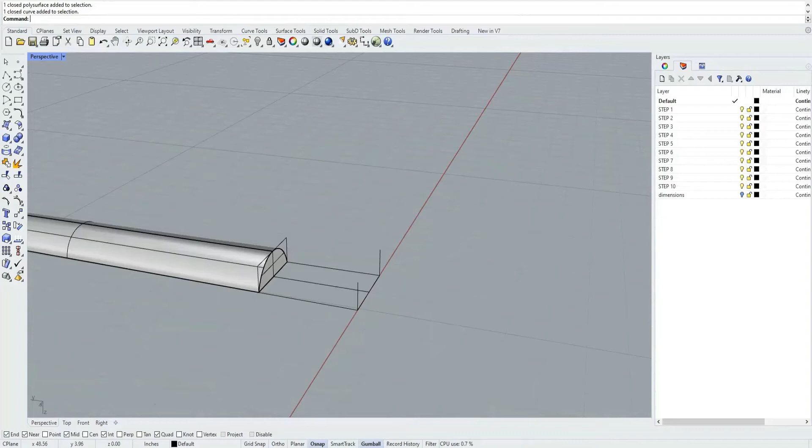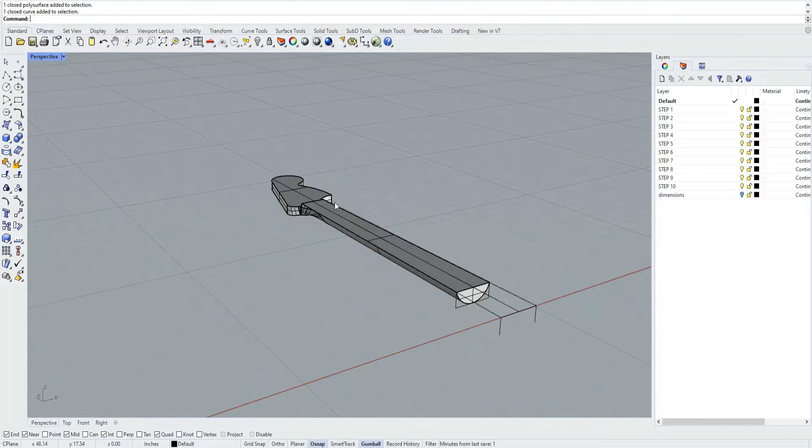Today we're going to be looking at how to model the neck of a guitar. If you're wondering how we got to where we are right now, I encourage you to go watch the previous video in this series. I'll try to remember to link that up in the corner for you guys to go watch. That explains how we got everything from the shaft to the head to the transition between the two. Today we're going to be looking at this part right here, how to model the heel of your guitar.

I want to mention right before we get into this, the dimensions don't really matter so much. We're mainly looking at how to learn the surfacing techniques of how to do this rather than really focusing on the dimensions. I encourage you to go dimension the neck yourself depending on what kind of guitar you want to build. Anyways, so I have this 3-inch long heel here.

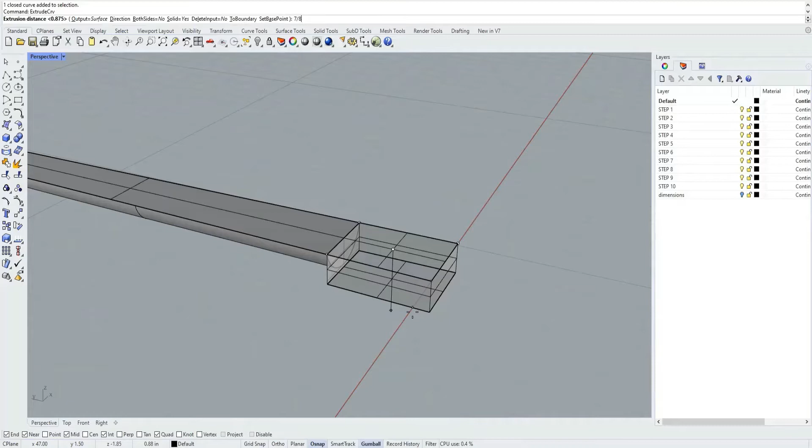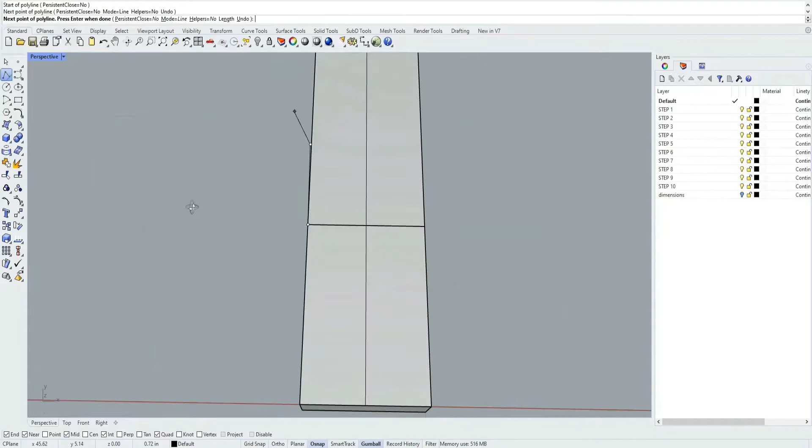I'm going to extrude that out to a depth of 7/8 of an inch. So this will be where our heel is, and then where we're going to be transitioning to that will be a 1.5 inch area in between the two here. So I'll draw a line out vertically and across, and then if we hop into our 4 view here, we can just get our trim command, select that as our cutting object, and trim that part of our neck away, and we can delete the lines we don't need. So this is where our transition is going to take place here.

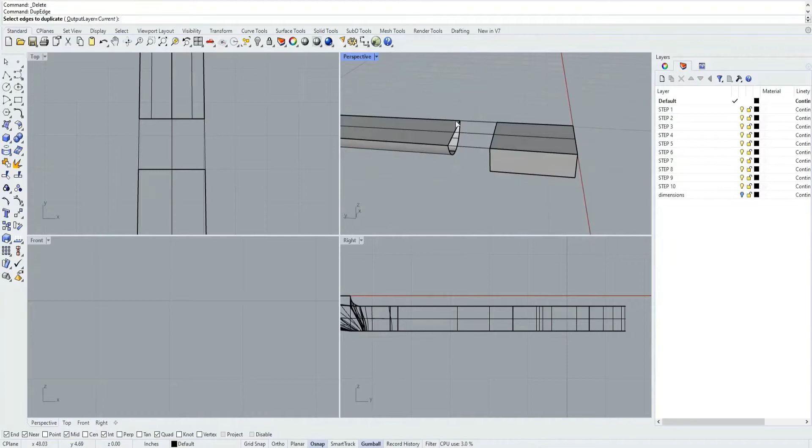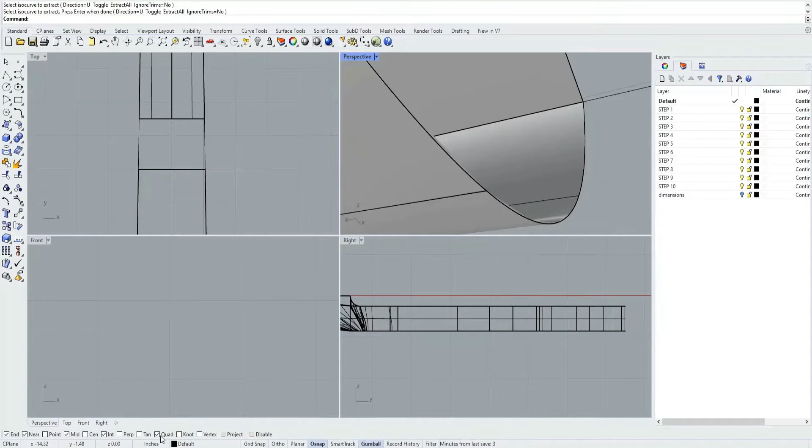We're going to go ahead and duplicate some edges, which will be along the shaft of the neck, and we're going to run extract ISO curve, and we want the middle of the neck. So for me that is I think a quad here. I'm going to go for the end intersection. If you're not getting those prompts there, turn on your O-snap and make sure the needed boxes are checked here in the bottom left.

So now that we have that done, what we're going to need to do is grab a polyline, connect to the corner of your box there, do a 0.5 line directly towards the back corner there, and do the same on the other side. So now that we have that, we can right click on the ellipse from center. We'll get a drop down menu and we'll select the ellipse diameter.

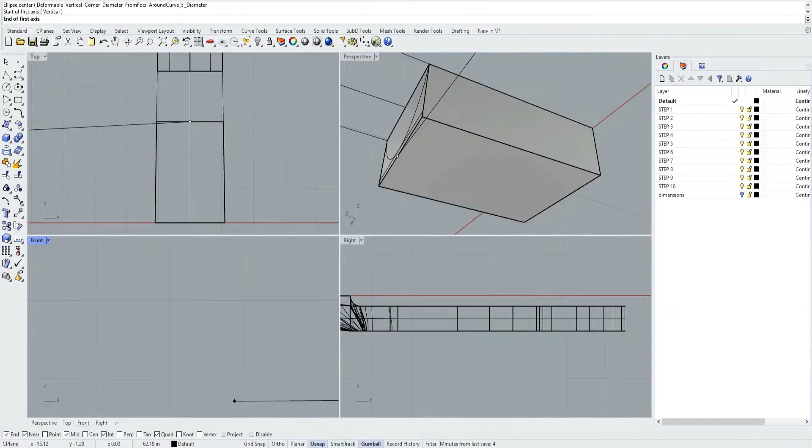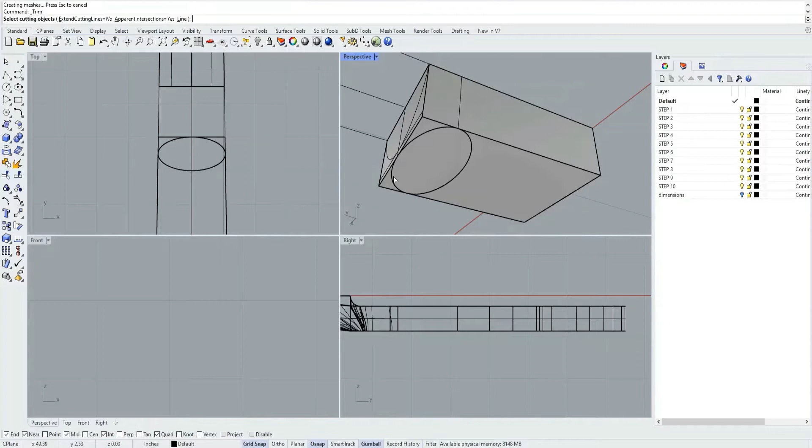So our first axis is going to start in the middle of our box there. If we go over to our top view and hold shift down and turn your grid snap on, you will get a 1-inch line. From that, we want to select our second axis as the end of that 1/2 inch line we drew earlier. So now we're going to grab that ellipse, extrude the curve, and go up to the top of our box. Then grab your trim command, select the extruded oval we made, and we can start to trim away parts of the box there.

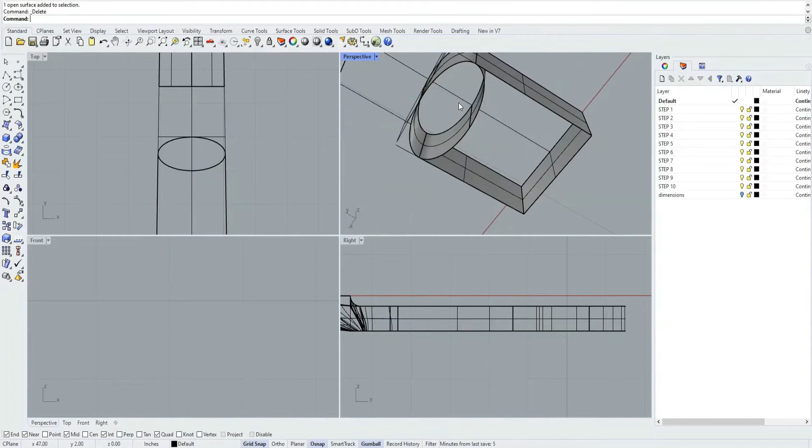So now select the box and the oval, press explode, and we get all of our surfaces that we're going to need. We can go ahead and delete everything off of the top and the bottom. Once you do that, press trim, select your side panels, and trim away the back portion of that oval. We can also delete some of these lines that we won't be needing, just so we don't get confused when we go to do the rest of it.

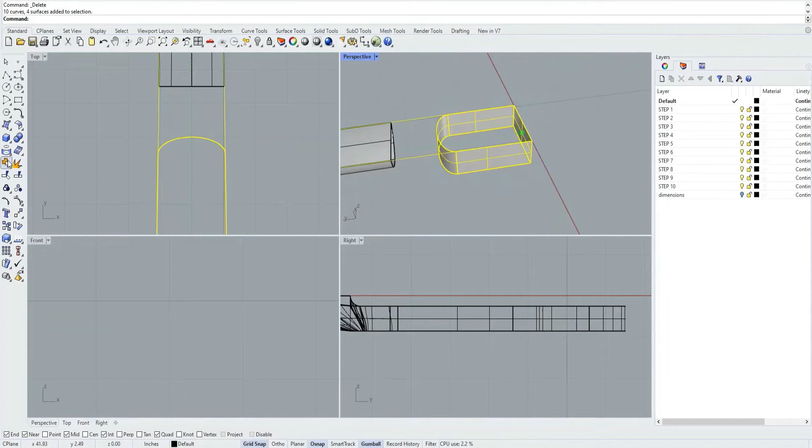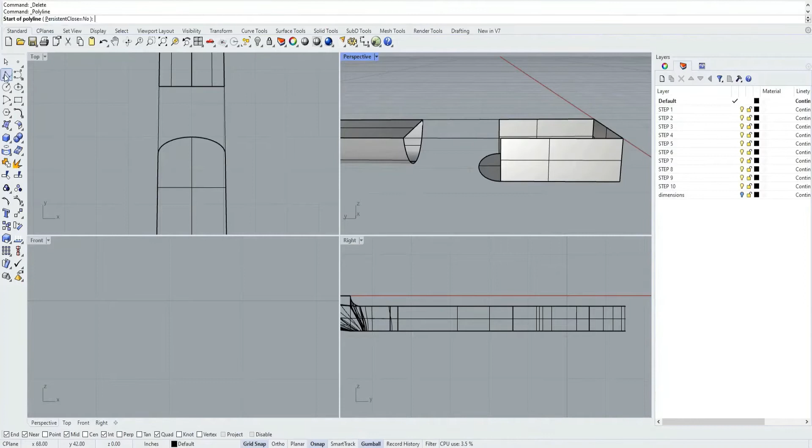Okay, so now that we have this bit here, we're going to select everything, join it up, do the cap command, so we get an enclosed box here, explode it one more time, and we can delete this face of the oval and the top portion. So this is what we're left with, kind of an empty box of where our heel will eventually end up. In order to start the transition here, we need to add in some guiding lines. So get that corner of where our ellipse meets the box, over here to the right view.

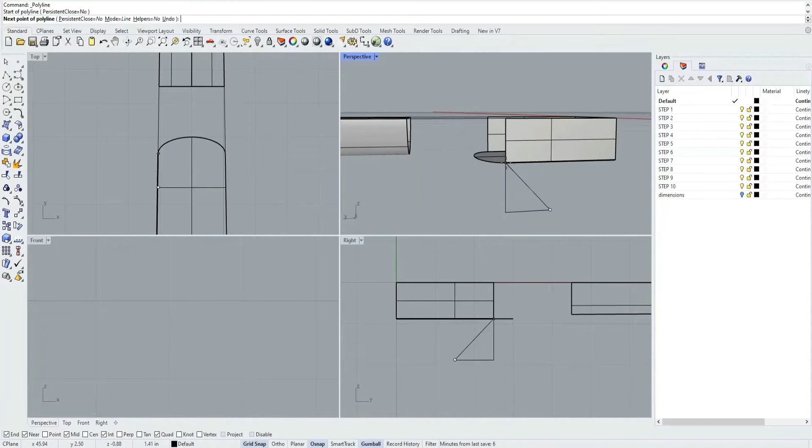Enter 1, go down that amount, and then 1 again, and go back towards the end of your heel, then make a connecting line between the two. This gives us a 45-degree angle.

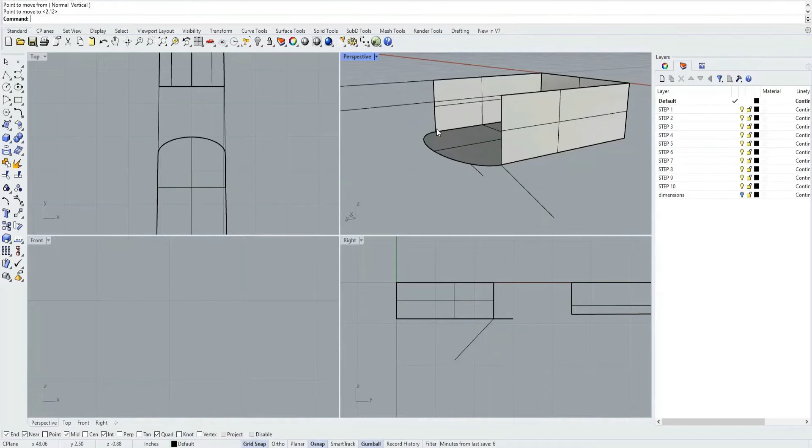Now that we have this line, we're going to copy, paste that, and run the move command. We will move that curve from the endpoint right where it is to the other side. You could also mirror that, but I find this to be a more consistent way of doing things. Rhino isn't always the best at getting things accurate when you're snapping, so I just like to move it to the correct point.

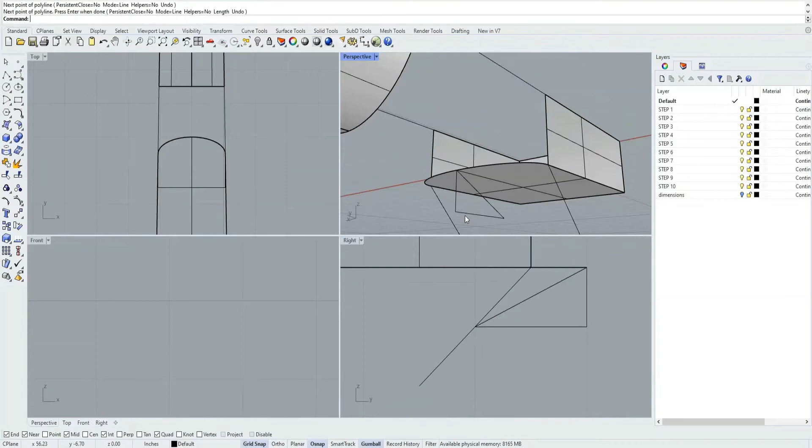For the middle, we're going to connect to the quad there, go down a half inch, and then over an inch. You can see that's kind of in the middle of where that is, but we can select from that point and connect the two ends. We'll end up with something that looks like that.

From here, we're going to run an arc blend command. Select the ends of the lines we duplicated earlier, and you should start to end up with these types of curves.

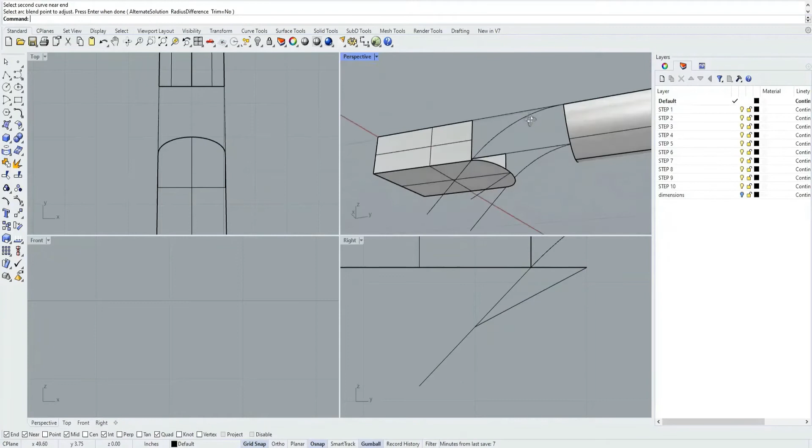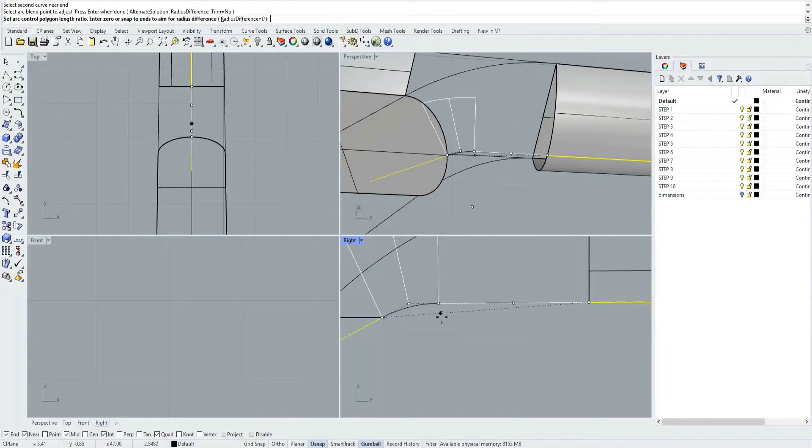When you do the middle curve, you'll end up with something that looks somewhat like this. So turn off your grid snap, grab this middle control point, and where you can see my cursor right now, this white line, you want that to be slightly above the black line. Otherwise it's going to look a little bit weird. So we can enter that.

We're all done there. We're going to duplicate some edges. We're going to want to duplicate the ovals here, and press enter and join those.

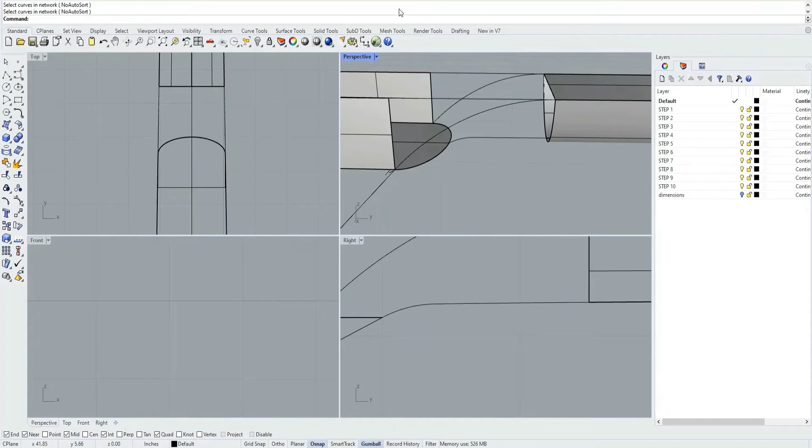Next we're going to be running a kind of finicky command. In your perspective view, make sure that it looks just like mine. We're going to run a command called NetworkSrf. Again, turn on no auto sort. Then I need you to run these commands in the exact same order that I do them, or else it probably won't work. First, select the arc that is closest to you, then the one in the middle, then the one in the back.

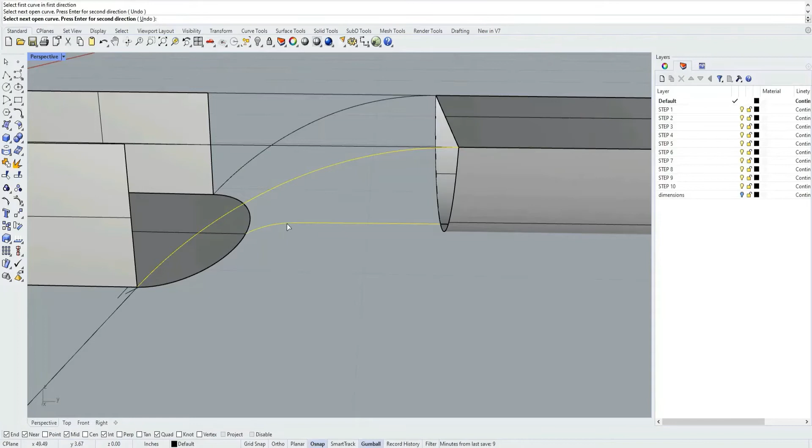Select enter. Then on the shaft side, we can select that one, and then we can select our heel oval there. When we press enter, we end up with this nice surface. As far as I know, there's no other way to get this surface, so I prefer this method.

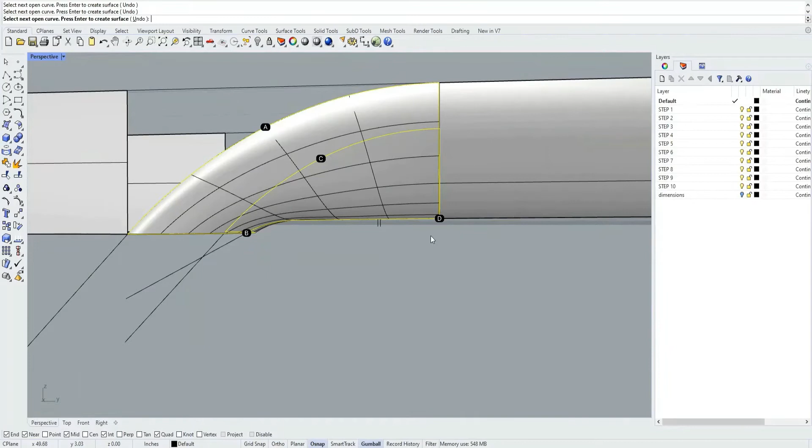Make sure they're all in the position order. You don't want it in any other one, so all position. We'll click OK. Next, we're going to want to delete these side panels. Go to Polyline, select the outline of where that side panel is going to be on both sides.

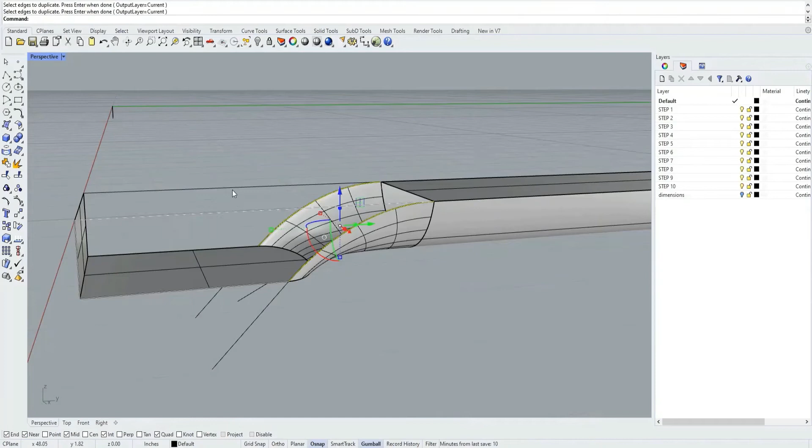We're going to run a duplicate edge command on both sides. Grab those two polylines that you just made, and we'll join everything and then run a planar srf. Now we have two side panels that are going to match up to our model here.

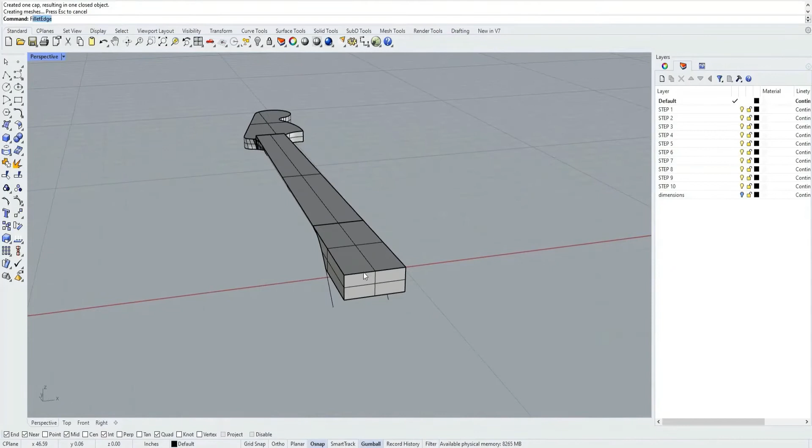At this point, we can just select everything, press join and cap. At this point, we're going to start getting into our fillet edges. I'm going to go for a 0.25 to round off the bottom here.

At this point, if you are planning to use this on a CNC machine, you are done. You can click off the video, it should work great for you. If you are planning on modeling an appearance model and you want it to look really good, we're going to get into filleting the bottom of this surface.

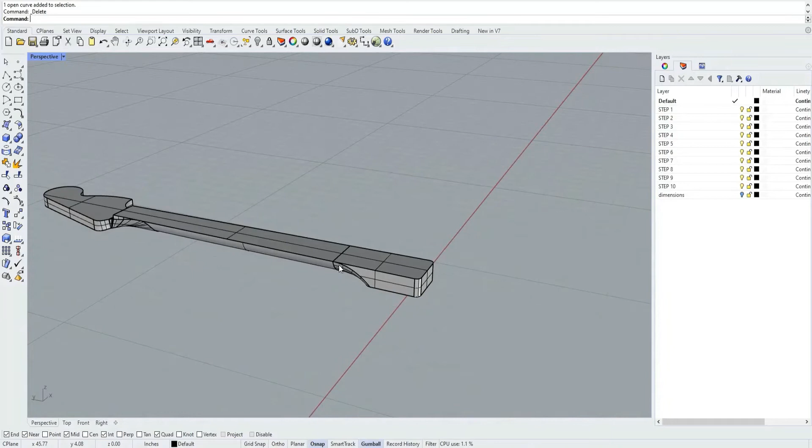I'm going to show you how to do a custom fillet that's going to look a lot better than the auto-generated one that Rhino will give you. But if you're not interested in that, this is all you need to do.

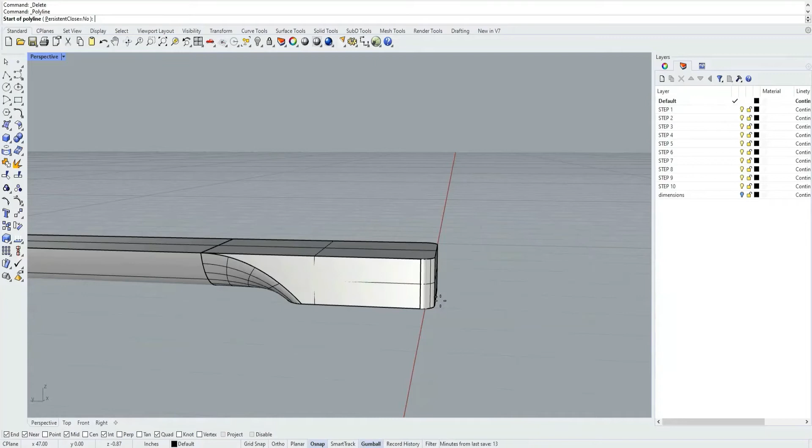Now that the only people left are the ones who want to go through the painful process of filleting in Rhino, we're going to want to select anywhere on the bottom of our surface. We're going to go back into our 4 view here. I want to end up with a 1/16 fillet around the entire bottom of my neck.

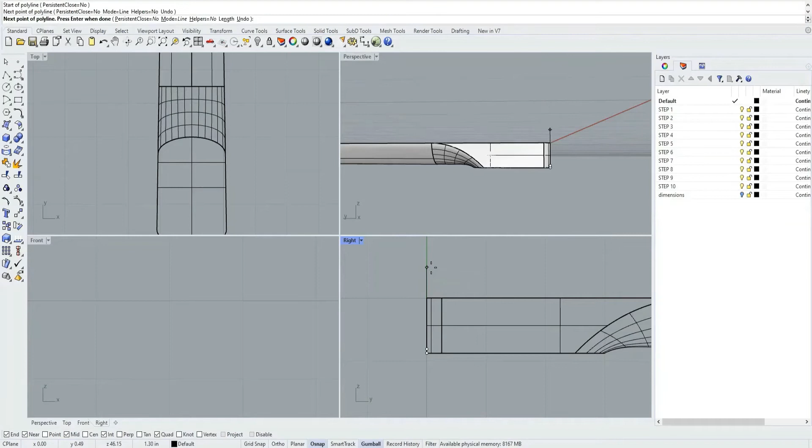So I'll select that there. From that point, I will select the end point. I will drag it across so it crosses the entire model. You can use your scale to make sure it goes all the way across the model. If you don't have that on, it's the gumball setting right there.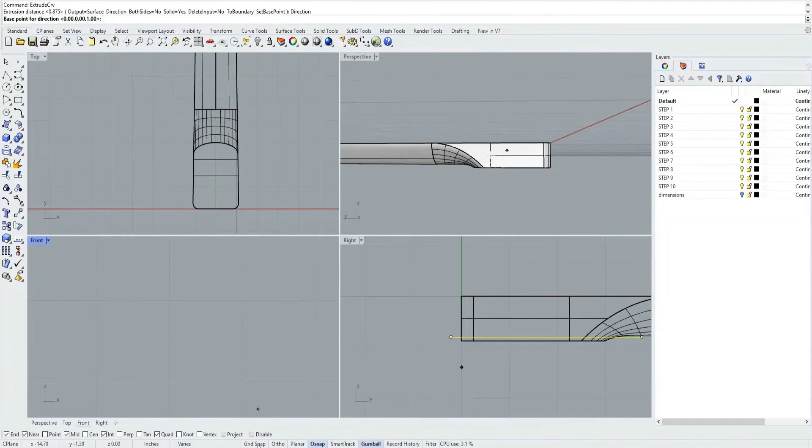From that point, we're going to do an extrude curve, and we're going to want to select the direction. Turn on our grid snap and make sure that is going sideways.

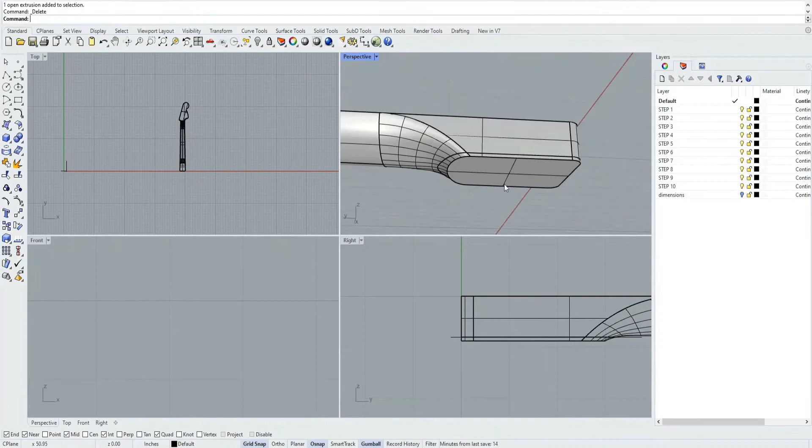Okay, so now we have a surface that we can split the bottom portion off here. So I'm going to go to split. Objects to split will be the guitar neck, and our cutting objects will be that planar area that we made there. So we have this now.

We're going to want to duplicate the edges on the bottom, join those up, and then we are going to offset that again, 1/16 inwards. Make sure that goes inside.

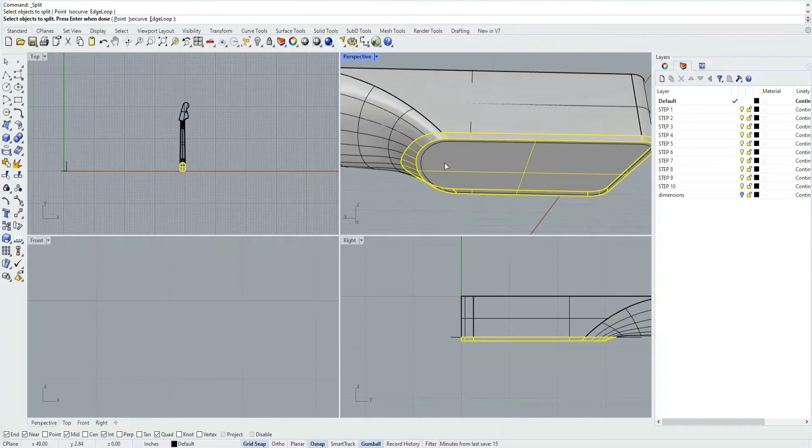Okay, great. Now we can do a split command again. We'll split this bottom section by the offset we just made, and we can delete the other portion that's left. So now what you have here is kind of a gap where you would expect a fillet to be.

We just have to make sure the computer knows where we want those fillets. So first off, we have to do a couple things. We have to extract ISO curves. So we'll select this one here in this direction right here that you see now.

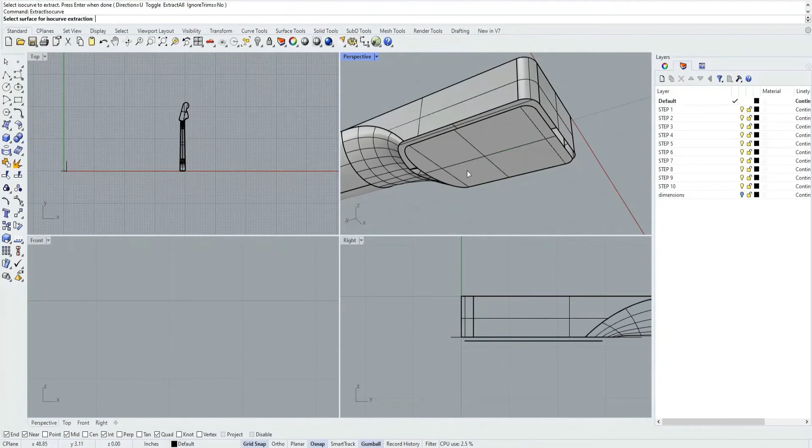We'll go to the end on both corners of the fillet there, and then we'll do that again, toggling the direction, and we'll have one going straight up the middle. So that will be our V direction right there in the middle, midpoint.

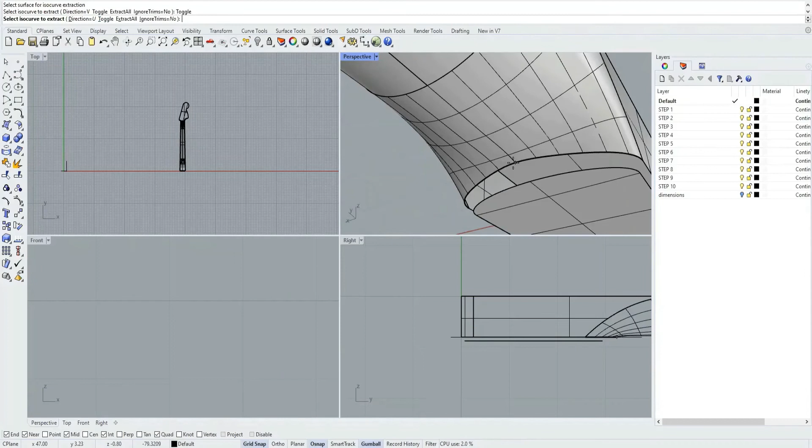Awesome. So from there we can run arc blends. So we'll select the middle of this, and we should still have - okay, so we have to do one more extract ISO curve on this one. Toggle the direction and get the midpoint. Okay, great. Now we can do our arc blends.

So we'll go to arc blend, select those midpoints there. We get a nice transition. We'll do the same on the other corners at the front.

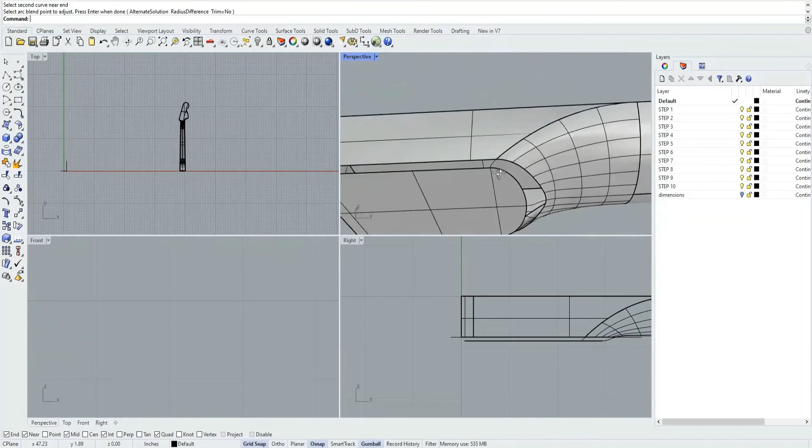Now for the back here, we're going to do something a little bit different because we want a perfect circular area here. So for our polylines here, I'll select the end. I'll go 1/16 up and 1/16 over. However, I could just select the end of my fillet there.

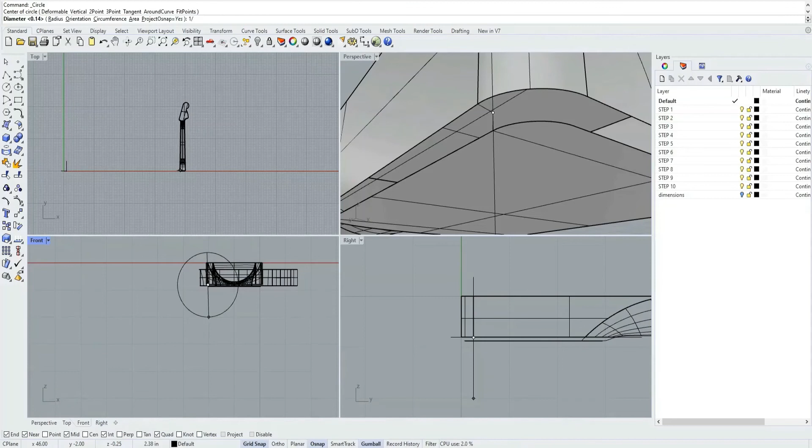After I do that, we'll take the center circle and draw it in the correct view. The diameter on that is going to be 1/8, so we can enter that in. Put in 1/8. There we go. I can hold shift, drag that straight down, and it'll give me a nice circle there.

We'll select our trim command, that's our cutting object, and we can just get rid of that.

Alright, so next we're going to want to mirror this to the other side, so just select it, press mirror, start of mirror plane, press copy yes, if that's not already auto checked for you. Select the midpoint of your model, hold shift, drag up, and click.

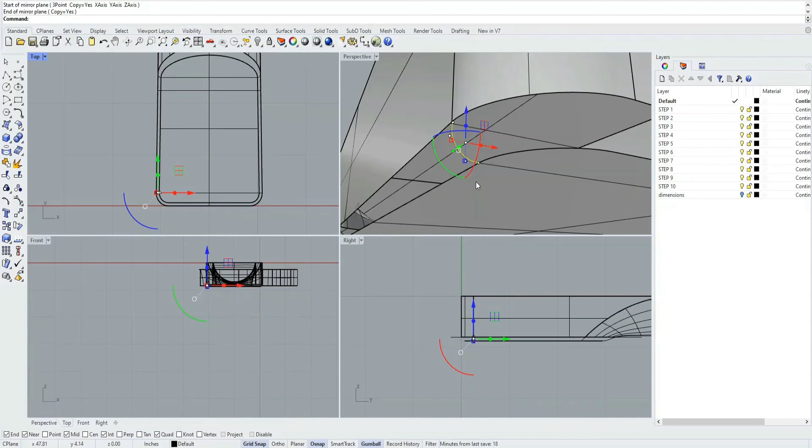Now as you can see, we will have the same fillet there. Alright, so after you have all those guiding lines, run a duplicate edge command. Select all of the lines on the top, and then join those up.

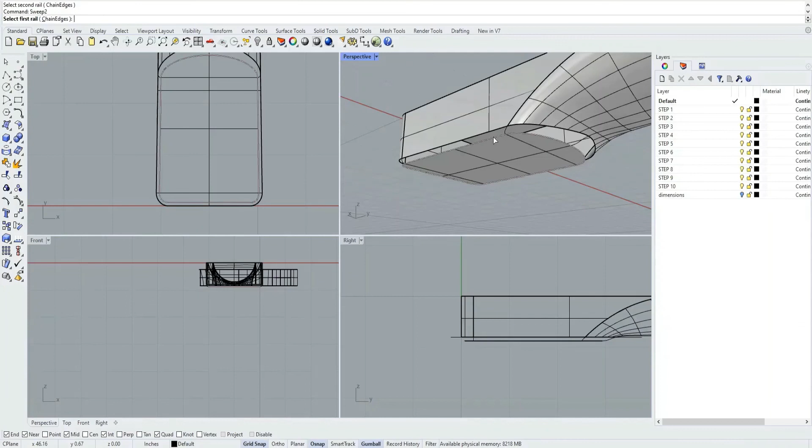Okay, so the last step here is just to run a Sweep2 command. So we'll select our first rail here and our second rail here, and then we'll just go through and select all of our sweep shapes, which tells the computer exactly how we want this fillet to look. And then once we've selected all those, we can just press enter.

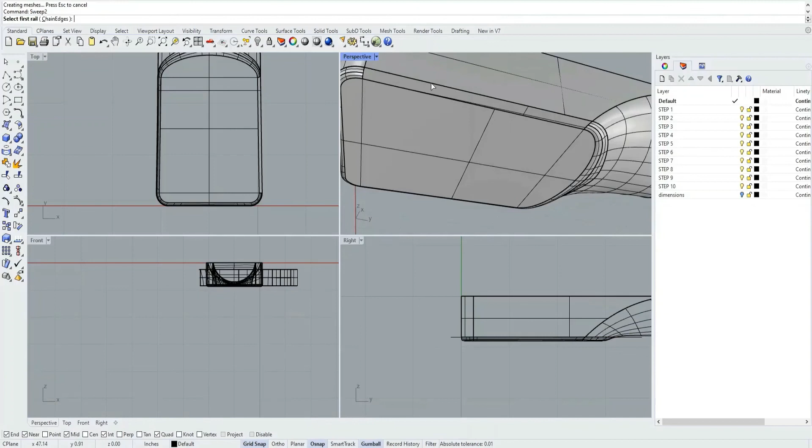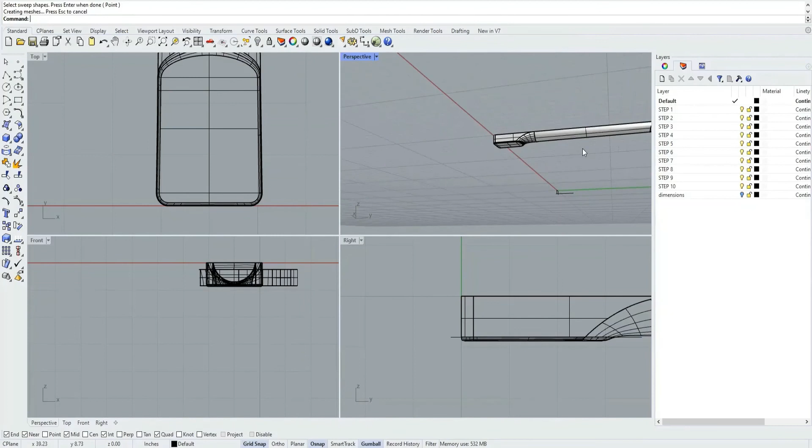There's going to be a gap here, maybe, not sure why, but that's pretty easy to fix. We can just select those again, select sweep shapes in between, and we'll just enter, and we get the remainder of that fillet. So Rhino should know how to do that automatically with a fillet command, but for some reason it just doesn't. But yes, that's a way to get fillets on your curves if Rhino doesn't want to do it for you.

Alright guys, so that's pretty much it on how to do the heel for the guitar. So I hope this helped everybody.